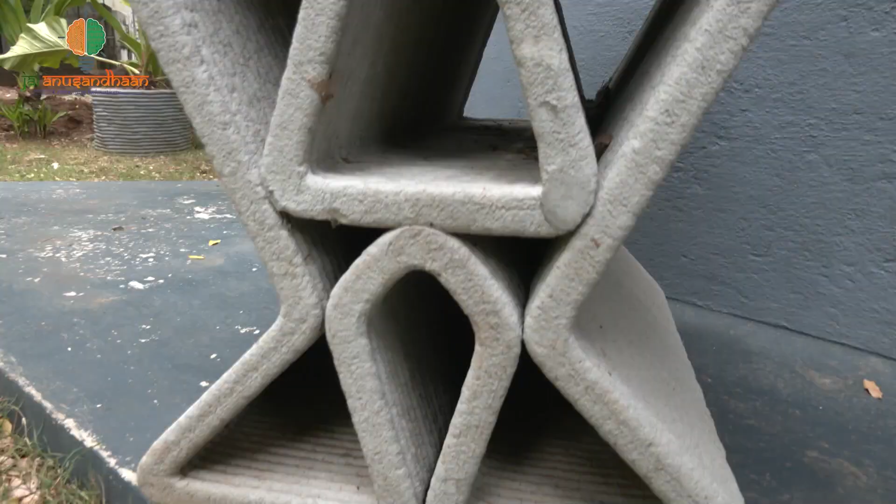Hi, I am Parivartan, co-founder and CTO at Tvasta. Myself, Aditya and Vidya Shankar, we have started from Center for Innovation, a club in IIT Madras. So we have started a 3D printing club where we were working on different types of 3D printers and generally exploring the technology. So in that there is an incubation program called Nirmaan, where IIT Madras encourages students to come up with ideas and then start their own ventures. So as part of that journey, we have started this company.

We were looking at different opportunities in the 3D printing space and identified there is a lot of productivity improvement that can be done in the construction industry, and additive manufacturing can contribute a lot in that industry.

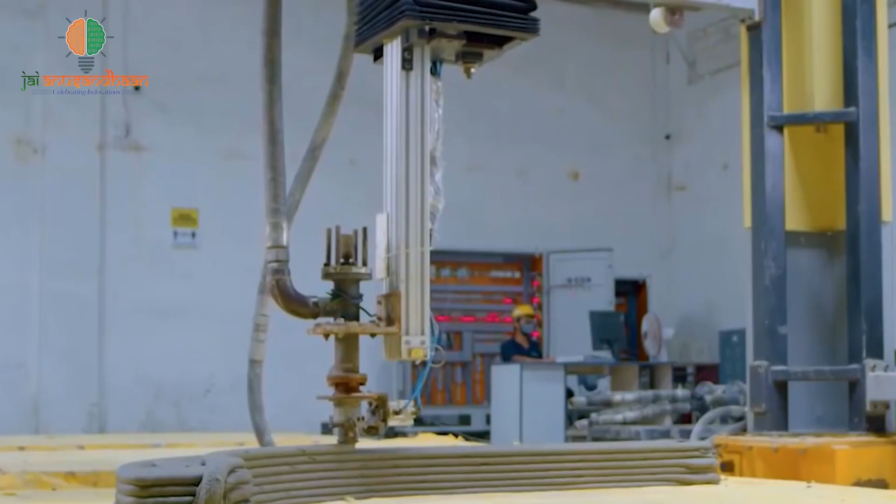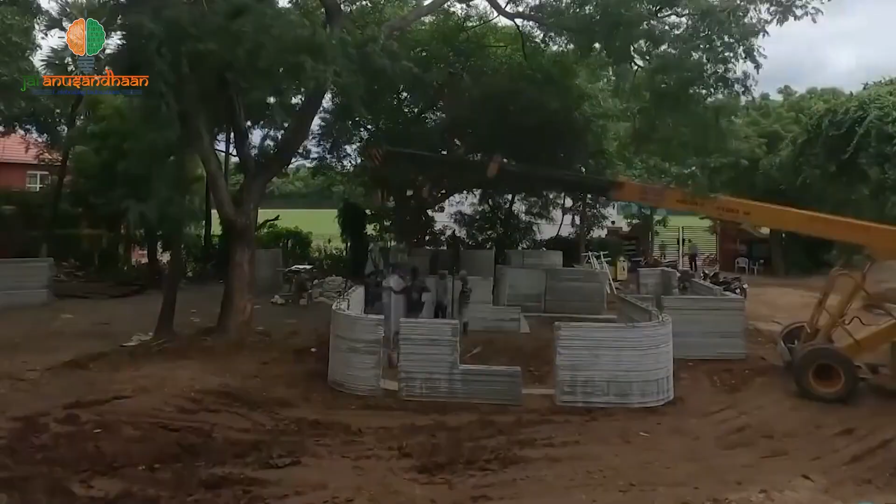Tvasta, a Sanskrit word that refers to the process of creation, is the name of this startup that builds end-to-end technology for enabling 3D printed construction in India. They have built the software, machine, material, and process necessary to make this happen. Using 3D printing technology, they want to provide a better shelter and workplace for all.

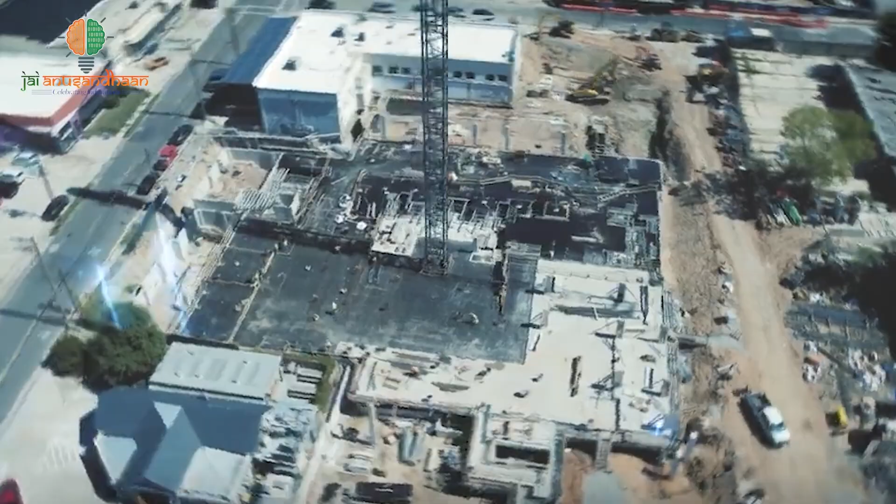So there are a lot of dependencies in the construction industry. There is a lot of requirement of construction for the poor people, for the MIG and for the LIG as well, and for the infrastructure, India being a developing country. And the kind of technologies which are there in the market will not be able to fulfill the requirement. So that's what we started working on, concrete 3D printing being one of the technologies to automate the construction.

So the idea here was to automate the construction so that productivity can be higher, it can be more economical, it can be greener, and aligned with these ideas, we can also improve the living standard of an individual, which was not being taken care of with the conventional construction methods.

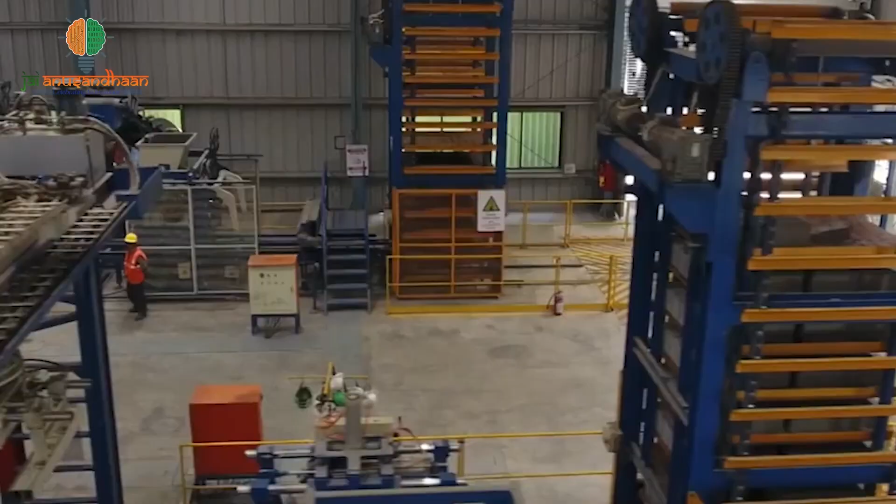So this is the problem that we are trying to target, and the solution is to automate the construction process, and one major tool that we are using right now is concrete 3D printing, using which we will be able to automate the construction process. We will be able to bring down the dependencies on the laborers. We will be able to upskill the labor more, and we will make the construction greener, more sustainable, and in very fast time.

Let's get to know about the process of how they incorporate 3D printing technology into construction and build houses. We actually construct houses with machines. In a layman's language, the process goes this way. Whatever needs to be constructed, for example a building, we make a 3D model of the building using any design software, and after that the design is fed to Tvasta's software, which will make a machine language, which we call G-code, which is nothing but X, Y, Z coordinates, which our machine will follow when the construction happens.

So once the machine language or the G-codes are generated by our software, it is fed to the machine, and parallelly we will also prepare our proprietary mix. So all these three pillars join hands together and the construction will happen. And after that we will do a little bit of post-processing like fitting the fixtures, the doors and windows and MEPs and other things.

So right now I think we have automated most of the construction part. Now we are focusing more on the automation of the finishing aspect so that we can increase the productivity more. And the major pro of concrete 3D printing is you can deploy as many machines as you can, so that you can do construction day in and day out with very high productivity.

So at Tvasta, we're really looking at redefining what architecture and design means for construction in general, not just of buildings, but also of public infrastructure, furniture, etc. If you see the current state of the construction industry, it's quite linear and wasteful. That is because the designs that are made are not made specific to the method and process of execution.

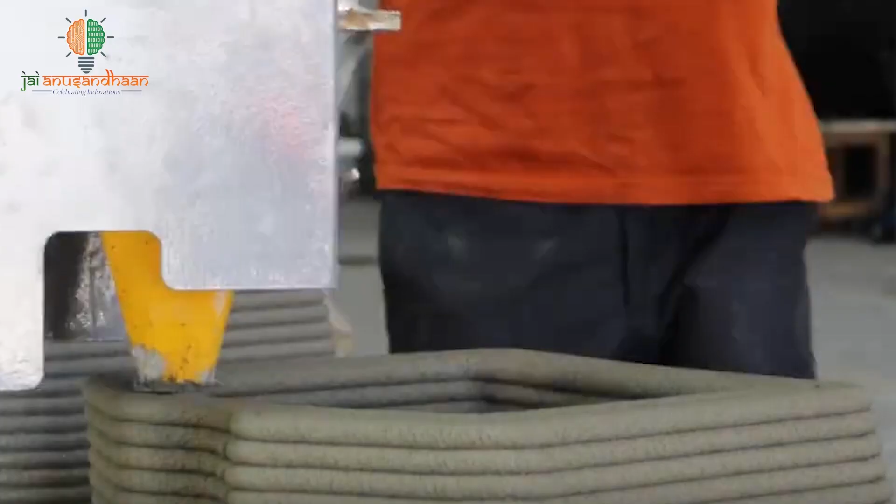Innovative solutions like these are providing an impetus to our country, and these innovators are taking our nation to great heights. There will always be problems around you. Identifying the problems and then taking that leap of faith and solving it is something that will be rewarded in the long run. We foresee ourselves constructing more and more in a very minimal time and continuing to improve the living standard of an Indian family and fulfill their dreams at an economical price.